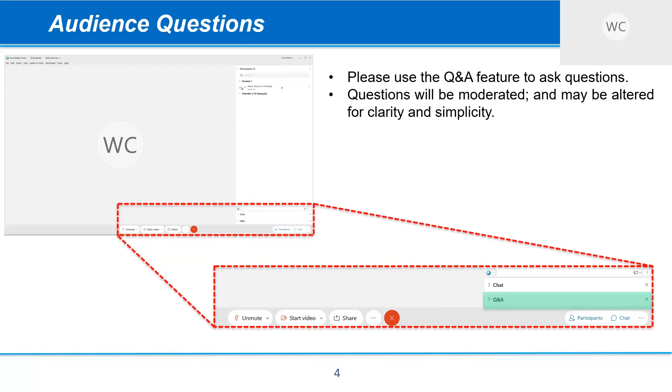So briefly, the Water Security Grand Challenge. The United States has historically benefited from access to low-cost water supplies, but challenges for freshwater supplies could threaten U.S. economic competitiveness and water security. The Water Security Grand Challenge is a White House-initiated, U.S. Department of Energy-led framework to advance technology and innovation to meet the global need for safe, secure, and affordable water.

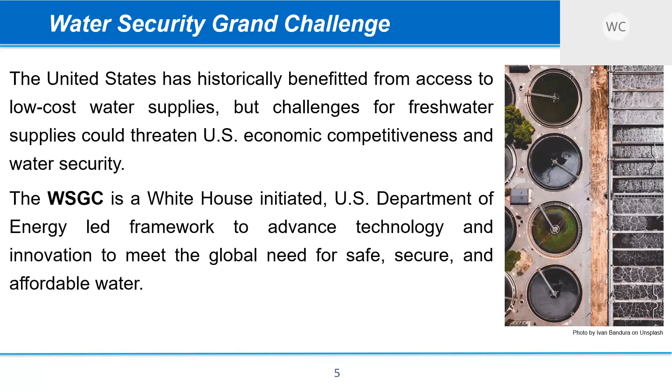Using a coordinated suite of prizes, competitions, early-stage research and development, and other programs, the Grand Challenge has set the following goals for the United States to reach by 2030: cost-competitive desalination technologies, transforming produced water from a waste to a resource, reducing water impacts at new and current thermoelectric power plants, doubling the resource recovery from municipal wastewater, which is what we'll be discussing today, and development of small modular energy water systems.

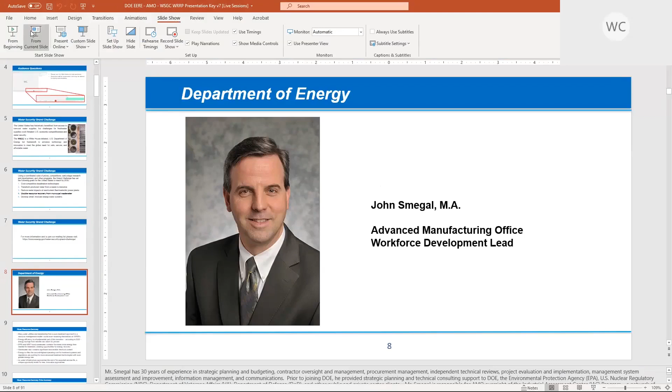Okay, just a second, I believe I have lost partial control from current slide. Apologies, I am having a little bit of technical difficulties. Oh, weird, apologies, just one second. My computer is not allowing me to pass keyboard control. William, if you can't give me control, I can just say advance if that works. Oh yes, that's actually a good solution. So I apologize. All right, that works for me, I don't mind.

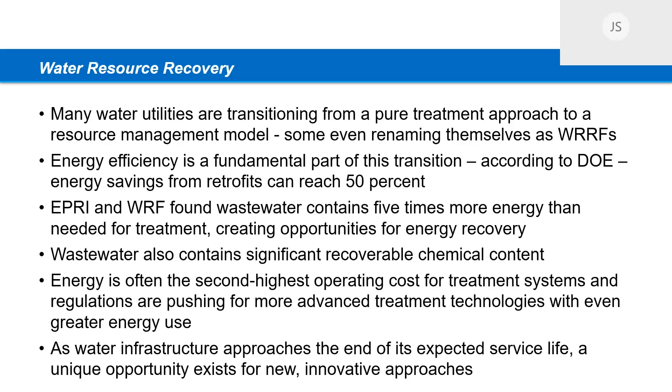The Water Resource Recovery Prize, as you all know, is 2 phases. We've just completed the first one, and that's why you're all here. The first phase is really a conceptual idea, a conceptual component, aimed at developing a library of solutions—10 winners that can potentially be leveraged or replicated in other settings. Phase 2, which is just getting underway here, is more of a demonstration of these technologies, providing a more enhanced menu of options aimed at reinforcing and capitalizing on previously discussed emerging trends within the industry.

The prize, as I said earlier, is looking at small and medium-sized facilities, and this competition has been unique in that it's beyond purely technology-based. Technology is the core of everything, but it's about expanding the technological feasibility outside the fence line of the facility itself. So we're talking about bringing in teams that represent all of the stakeholders, including downstream demanders. We're talking about utilities, agricultural interests, municipalities, engineering firms, universities. All of these were desired components of this phase 1 competition.

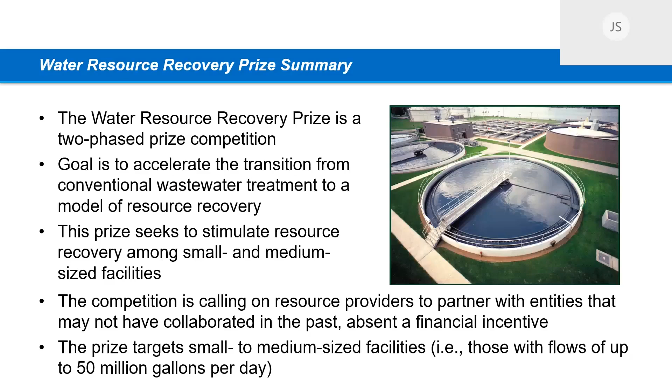All right, next slide. And this is my last slide. As you all know, we're right at that junction—we've gone through phase 1. COVID admittedly caused some delays in how we did this, but we're doing the best we can as far as that goes. So the timeline may be a little more delayed than what was originally envisioned, but right now, here we are in September, and we've passed that junction, and we're moving toward phase 2.

The phase 2 rules were released, I believe, on September 9th, and we're looking forward to a good process for the upcoming year.

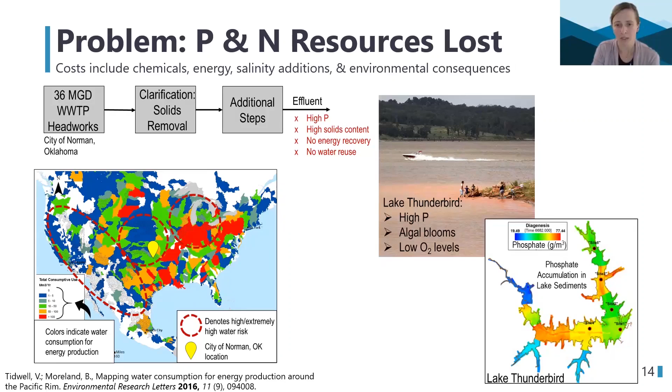So we're focused on the city of Norman in Oklahoma as our test case, and you can see in the slide I have a map here that shows water consumption across the U.S. for energy production, and also areas in the U.S. that have high water risk right now—and the city of Norman is in one of those areas.

So a little bit more about Norman. They are sort of an aging wastewater treatment plant that is looking to upgrade, and they're considered to be a medium-sized wastewater treatment facility in the central U.S., where there is a surplus of nutrients that would be good to recover, both phosphorus and nitrogen.

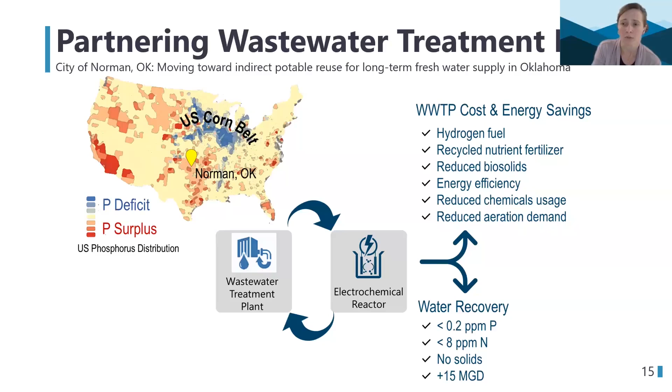And we see a lot of benefits for our potential technology, both in terms of water recovery and also in terms of cost and energy savings. I'll talk a little bit more about that in terms of the resources recovered.

Other significant benefits of our technology are that we also produce hydrogen, which can be recovered as a fuel during our electrochemical process. Because we use electrochemistry, we replace the need for chemical addition typically required for nutrient removal. So we're also reducing added salinity that's typically added to remove nitrogen and phosphorus in more traditional approaches, and we reduce overall chemical usage as a cost to the wastewater treatment plant.

And certainly another huge benefit is that we're going to be enabling a huge recovery in treated water for indirect potable reuse for the city of Norman as a new drinking water source.

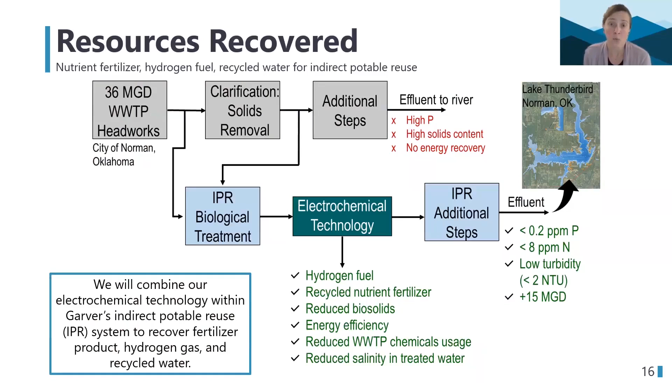So what we're looking to do is the electrochemical approach, which has the benefit of no additional salinity added, and we're recovering a fertilizer called struvite, which is magnesium ammonium phosphate, from our process.

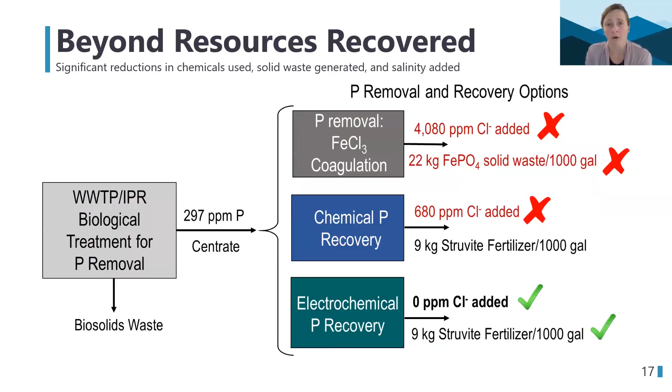My co-founder for Catalyze is Shelby Foster. She's the CEO and will be leading business development and the market business plan. We are partnering with Mike Watts and Sean Skouras from Garver, consulting engineers directly involved with the City of Norman and their indirect potable reuse project. We're also partnering with Chris Mattingly, Director of Utilities for the City of Norman, and we'll be working closely with all team members for phase 2.

And with that, a huge thank you for listening, and I look forward to any questions.

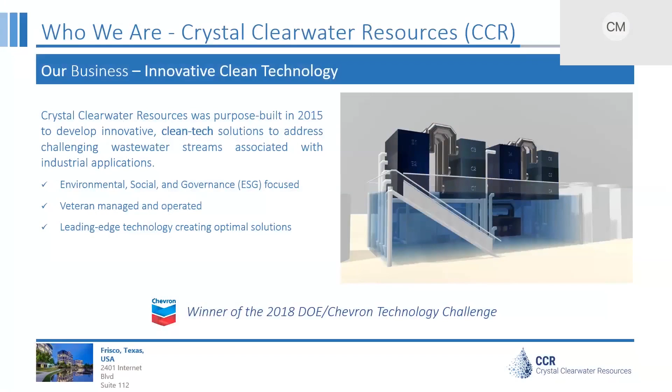We help companies fulfill the environmental aspect of their ESG standards by creating optimal solutions through leading-edge clean technology.

CCR's proposal is in partnership with Ramona Municipal Water District, Dudek, and Southern California Alliance of Publicly Owned Treatment Works, or SCAP. CCR proposes using our patented low-temperature distillation, or LTDis technology, to improve upon multiple aspects of the existing resource recovery process. Integrating our technology will increase the amount of recovered water available for reuse by nearly 100% and reduce the current disposal volumes by approximately 90%.

This reduction in disposal will eliminate an estimated 17,000 truck miles per year, significantly reducing the risks and environmental impact associated with the transportation of brine to the Point Loma ocean outfall.

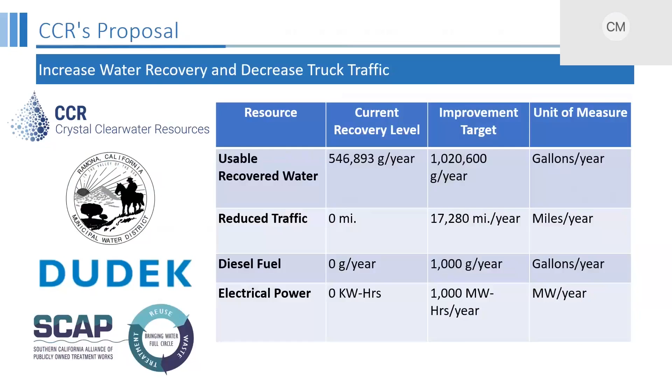The San Vicente Wastewater Treatment Plant currently utilizes reverse osmosis, or RO, as a component of their treatment process, which recovers approximately 550,000 gallons of reusable water per year. Integrating LTDis technology into the current treatment process will concentrate the existing RO waste stream, providing increased water recovery and decreased disposal volumes. This will result in lower disposal costs and lower greenhouse emissions from the disposal process.

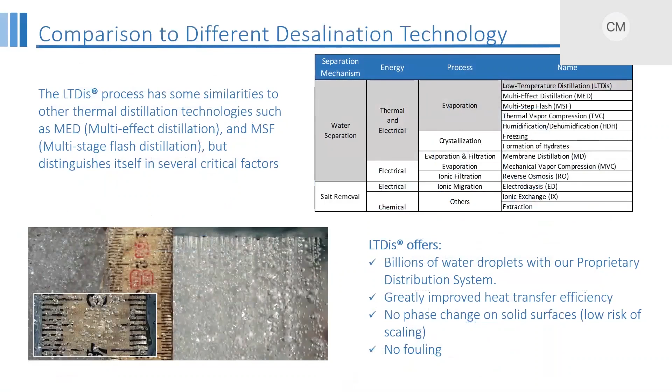Our proposal also requires a microturbine generator to drive the thermal process, which will provide all the required electricity for the LTDis plant. Excess electricity can be used to augment a portion of the electrical demand from the existing treatment process.

What differentiates the LTDis technology is that the phase change in the evaporation process occurs on billions of water droplets instead of tube bundles or membranes.

With no phase change on metal surfaces, this virtually eliminates scaling and fouling risk within the plant. Additionally, the droplets in the condensation process allow for a more efficient heat transfer. Our technology operates under vacuum and is tolerant to fluctuating wastewater streams of up to 300,000 parts per million, requires little to no pretreatment, and operates efficiently under both full and partial load conditions.

CCR's plants can utilize various heat sources ranging from conventional boiler systems to both low and high-grade waste heat to drive our thermal process.

LTDis is a step change technology from existing thermal distillation processes that promote seamless integration between other wastewater resource recovery facilities. Plant size can be scaled up or down to meet a facility's requirements. Our vertical design and lack of tube bundles allow for a significantly minimized footprint, making LTDis ideal for smaller applications where space is restricted. The standardized and modular design allows operators to be familiar with the systems across multiple facilities. Our technology augments an already robust system by allowing standardization in maintenance, personnel training, and plant equipment and supplies.

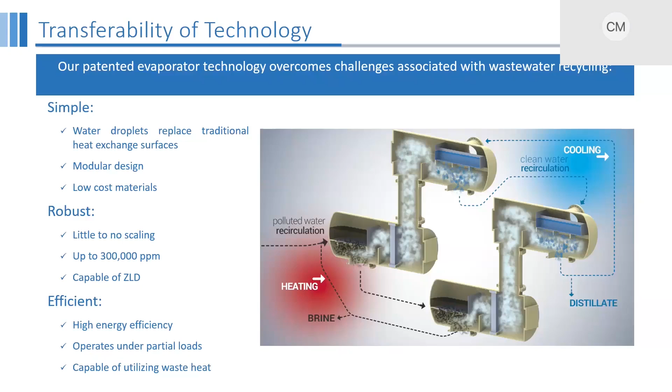While not economically viable at a location the size of the San Vicente facility, integrating our patented low temperature drying, or LT Dry, technology with our LTDis system, we can achieve zero liquid discharge, or ZLD. Combining these two technologies eliminates the need for brine disposal, resulting in a full separation of water and solids and potential recovery of other valuable minerals for reuse.

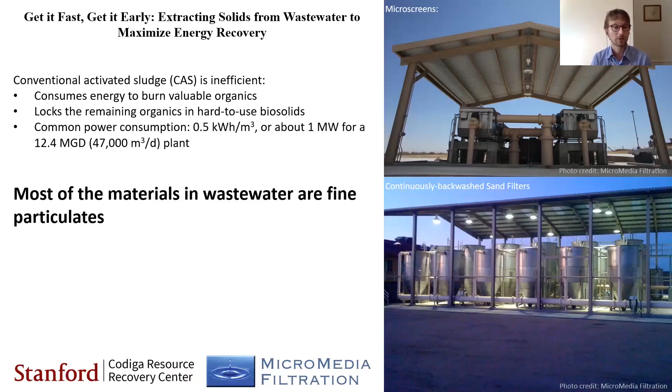Our approach that we're pioneering here is to really aggressively remove particulate matter from the wastewater upstream as soon as you can, essentially. Hence the name, get it fast, get it early. We're relying on two processes to do that. The first is this process you see on the left, called a microscreen. For wastewater professionals, that's a machine that looks very similar to a gravity belt thickener, but you use a screen that has a porosity.

In our case, the porosity can vary, but up to 300 microns is typical. The water filters through the belt, you intercept the solids, and they form a mat on the screen that promotes even greater filtration. You can extract the solids and dewater them, whereas the water flows on to the next process, which is a continuously backwashed upflow media filter. In this system, we have water flowing continuously up through a bed of sand, whereas the sand is constantly flowing down. This allows us to continuously clean the sand and achieve essentially optimal filtration constantly throughout the process.

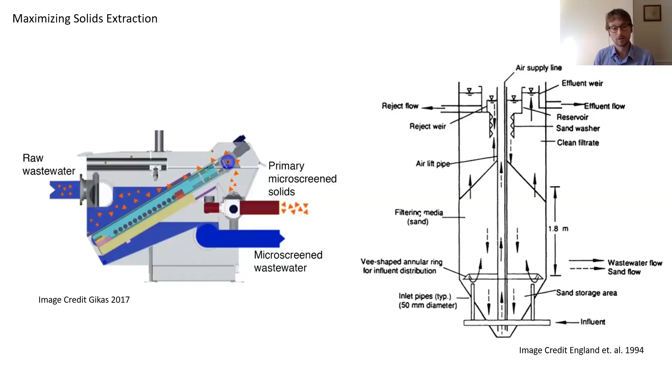These sand filters were previously certified in the New York City watershed as achieving equivalency to microfiltration. So you can achieve a very high degree of filtration upstream of your process, which makes everything else simpler and more energy efficient. To show the full process flow diagram of a typical treatment plant: you'd have your wastewater coming in with bar screens, grit removal, and then a primary clarifier, which achieves about 50% typical solids removal. So you're still sending a lot of solids into your biological treatment process that still need to be removed.

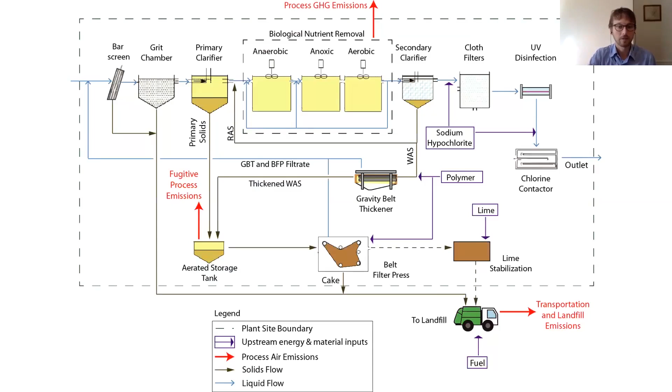By contrast, if you go to the next slide, the treatment process that we're proposing relies on a microscreen and then a primary filter, this advanced primary filter, to dramatically increase the amount of solids that are diverted and sent to solids handling. This is important because your solids have energy value and resource value, and your liquids, in general, the highest value is in the water.

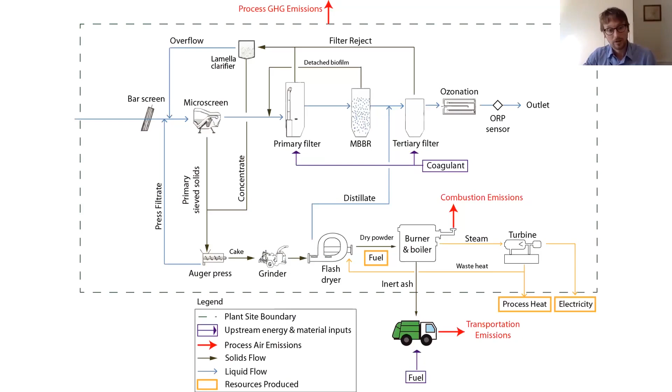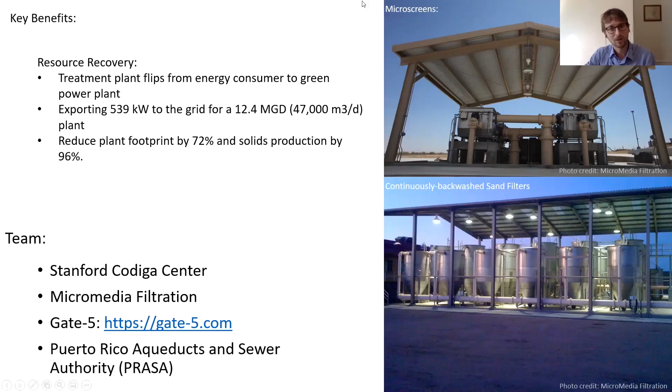Hi, thank you. So I'm the CEO of Impact Bioenergy, professional civil environmental engineer, certified for quality and organizational excellence, and we are also the owner, operator, and beneficial resource manager for distributed anaerobic digesters.

Let's advance to the next slide. Well, that's the cover the other way. So Impact Bioenergy has about 10 years of experience in applying traditional anaerobic digestion to small, distributed, in almost all cases modular and prefabricated digestion systems.

The focus has been on urban food waste, craft beverage manufacturing, food manufacturing, and now with this new project, with our phase one, we've pivoted back into the wastewater industry to merge our experience with other non-traditional feedstocks and look at co-digestion. So our skill set is to build modular, prefabricated, fast deployment digesters.

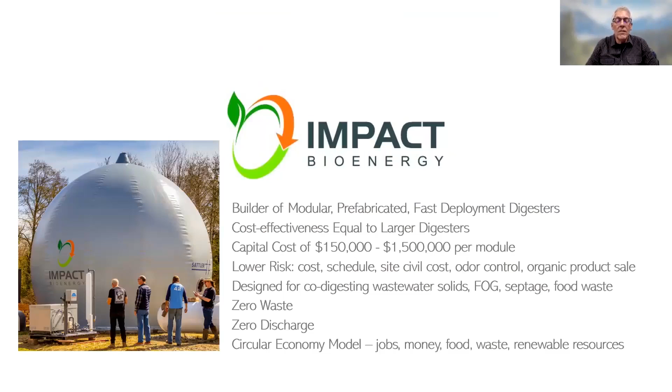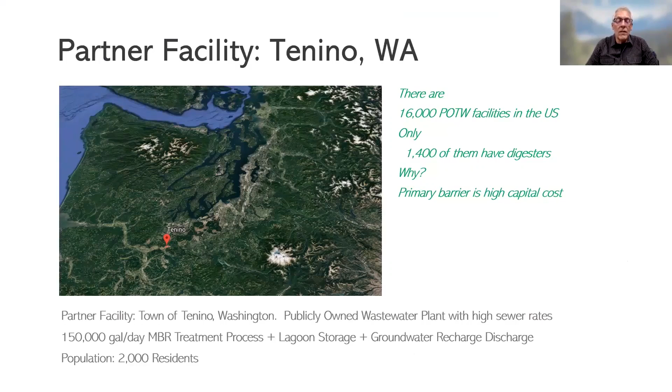Next slide, please. So the project that we advanced in phase one was called an Integrated Bioresource Recovery Project. And the objective is to prove cost effectiveness using a small to medium scale approach.

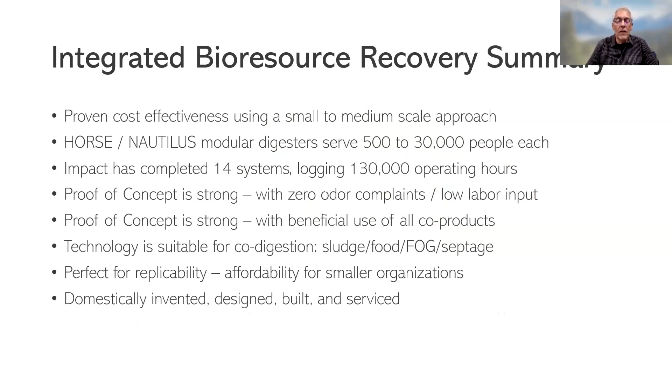Domestically, it's domestically invented, designed, built, and serviced. So this is a U.S. technology born in the Pacific Northwest, and we now have facilities across the country with the 14 systems already deployed. Next slide, please.

So we're actually partnering with the city and the county. It is a net energy producer, which is part of the backup. But the energy is only half the story. The organic outputs are the other half.

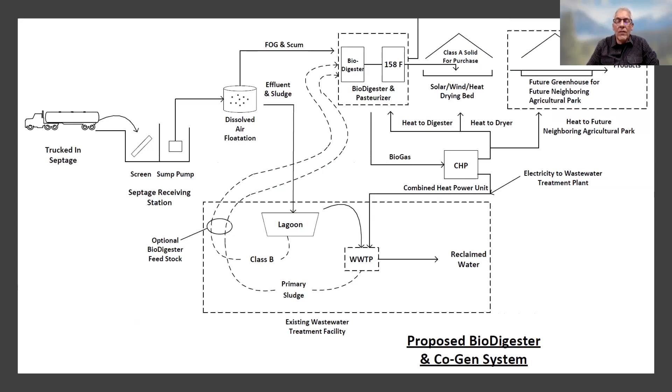Next slide, please. This is a graphic of how this works. And one of the reasons we can do this is we are eliminating a tremendous amount of diesel fuel and trucking and transportation. All of this is done, co-located at the wastewater plant. And it also supports some of these local businesses. There are a number of cases where food manufacturing or beverage manufacturing is causing problems for existing wastewater infrastructure, and we're directly addressing that. Next slide.

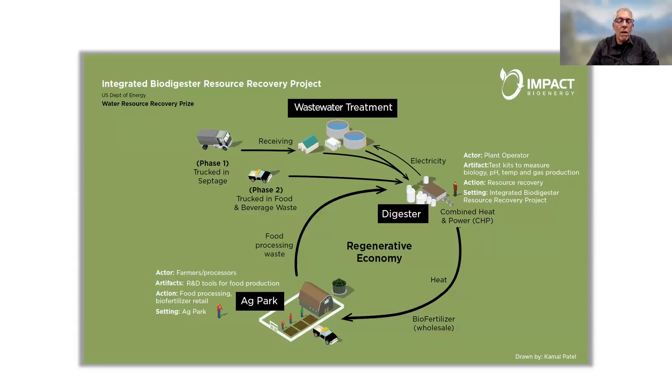And then the organic products go out as a liquid, and then we dehydrate them and make a blended fertilizer. And in many cases, we're being integrated with a farming system to actually take the organic outputs from the digester and go right into food production on site. So it's beneficial use of all the resources that come out of the digester, and it simultaneously improves air, water, soil, climate change, job market, that we can touch all of these simultaneously. Plus, the community becomes more resilient and independently sustainable.

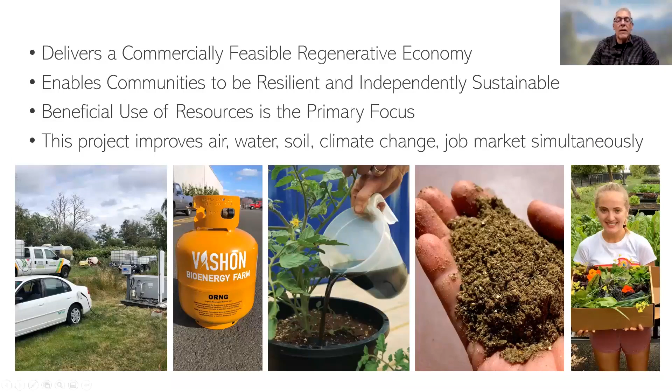Next slide, please. So, cost effectiveness. This is surprising, but we've been at this for 10 years trying to microscale digesters. It's a huge lift for us, but this does show that we compared our Nautilus, which is 1,500 wet tons a year, to the Hunts Point digester design report from 2010, and we are exactly the same capital cost per ton per year of input, which is how the metric we use.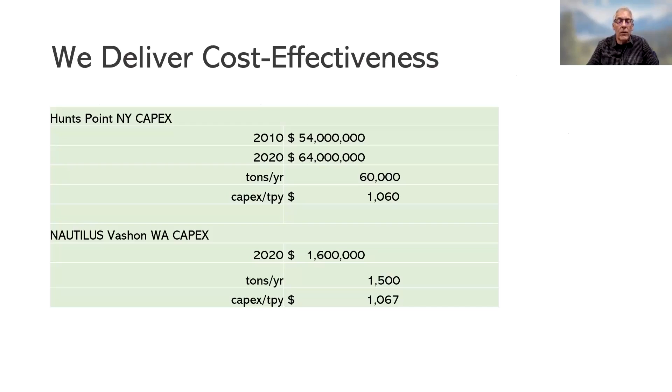So this can be, the economy of scale argument really does not hold water, so to speak, when we deploy these systems. We're equal to the larger systems in benefit cost ratio. Next slide, please.

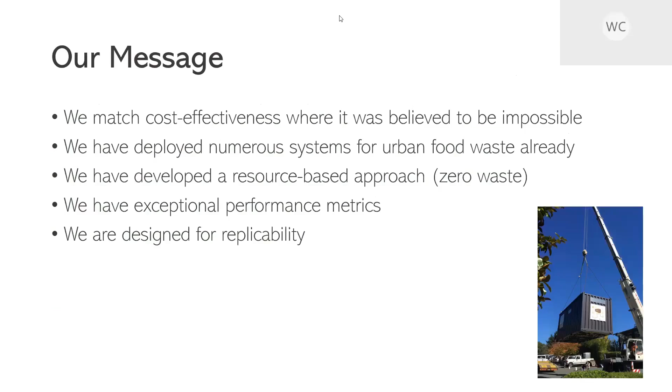So we're matching effective. Apologies to interrupt, Jan. Just due to timing, I have to cut you off. Okay, I apologize for that. But yeah, please have a second to take a look at this slide, and then I think this may be the last one. Yeah, that is. Thanks. And then thank you so much again for your talk, Jan.

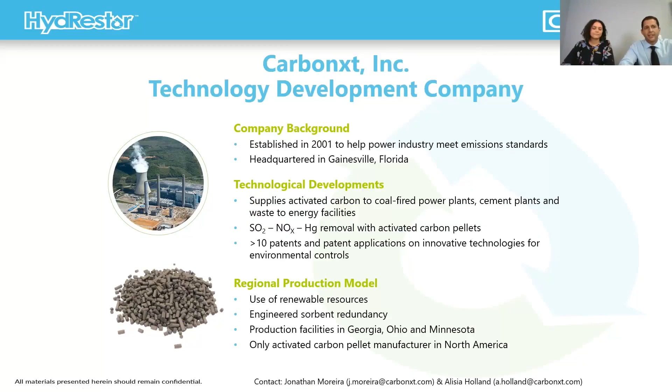With our headquarters in Florida, it's only natural that we take a keen interest in the ongoing water impairment catastrophe we've had here over the last few years with the blue-green algae blooms. The primary driver for this ecological disaster is the discharge of excess nutrients, both phosphorus and nitrogen, to our local waterways. The source of this discharge includes, but is not limited to, excess fertilizer, both from agricultural and residential sources, along with wastewater and stormwater runoff. The nutrient loading of a body of water is one of the factors we use to determine the health of the local ecosystem.

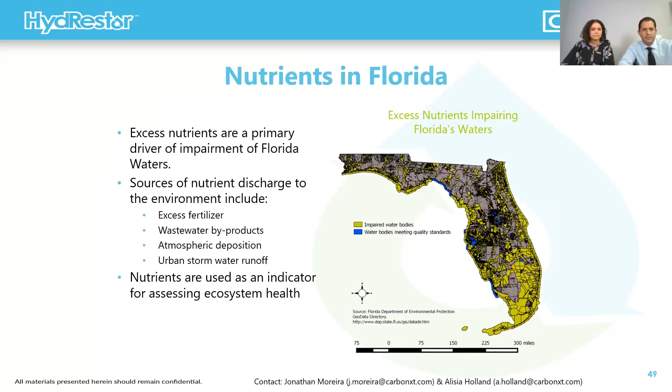So to attack impairment of our local waterways, Carbonxt has engineered a sorbent with enhanced phosphate sequestration capabilities. Its ability to both adsorb phosphate in application and subsequently be recovered and reused as a soil amendment makes this a doubly environmentally friendly solution.

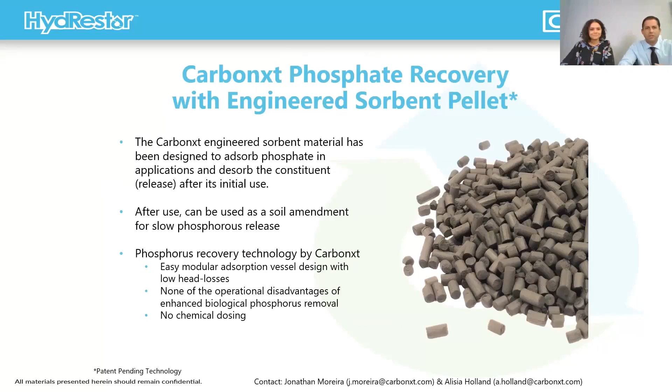The solution we're talking about is HydRestor. Additional advantages of our HydRestor technology versus traditional biological treatments include a much smaller footprint for our treatment vessels, an improved ability to handle fluctuations in influent nutrient concentration, as was asked earlier about seasonal fluctuations, and a reduction in system head loss. Couple these advantages with the copious other benefits throughout the media life cycle, and you have a bona fide solution to excess nutrients. Alisia will now delve into the pilot testing and results.

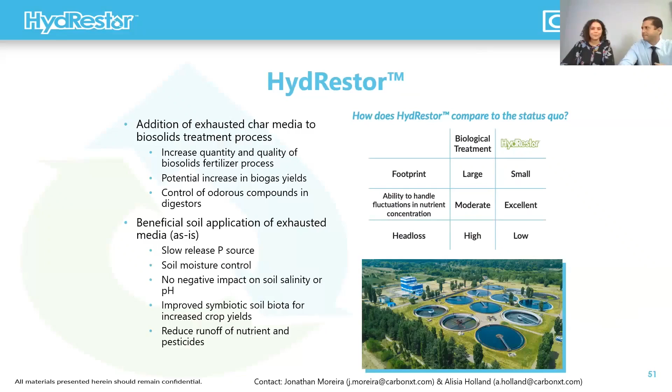William, can you please advance? Great, so again, my name is Alisia. I work in research and development at Carbonxt, and I'm excited to present some early results on our partnership using HydRestor with Braden River Utilities.

Braden River Utilities, or BRU, is a private utility that serves the Lakewood Ranch community in Southwest Florida, which straddles Sarasota and Manatee counties. They're contracted to receive up to 19 million gallons per day, or MGD, of reclaimed wastewater from the cities of Sarasota and Bradenton, as well as from Manatee County.

However, the water from Manatee County does not meet the Advanced Wastewater Treatment Standards, or AWT standards. So at scale, this project will process at least 1 MGD of non-AWT reclaimed water from Manatee County before storage and distribution, at a construction cost of about $1 million. This cost will be shared between BRU and the Southwest Florida Water Management District.

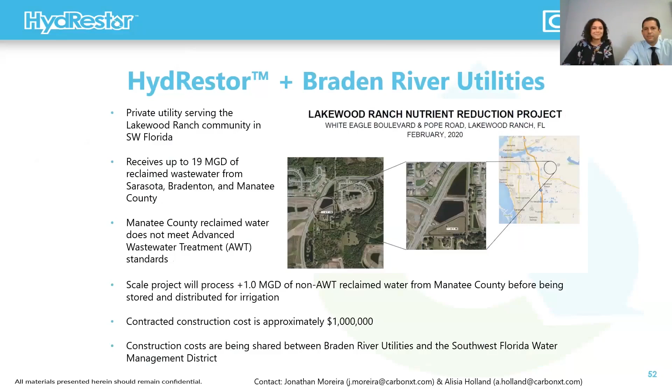So we tried this again at higher flow, and this is ongoing now in 2020. We had fluctuations between about 1 and 4 milligrams of phosphorus per liter in our influent, but our effluent was able to meet or exceed our treatment objective of 1 milligram per liter of phosphorus, even under high flow.

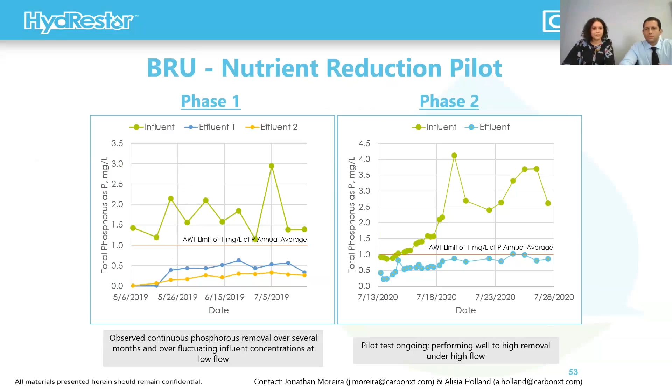You may be thinking, where can I fit this technology into my existing treatment plant? I think that's half the magic. Our media does very well in modular vessels as well as in cast-in-place structures, and it's designed to be placed downstream of secondary treatment and upstream of disinfection, but this is highly customizable to suit your needs.

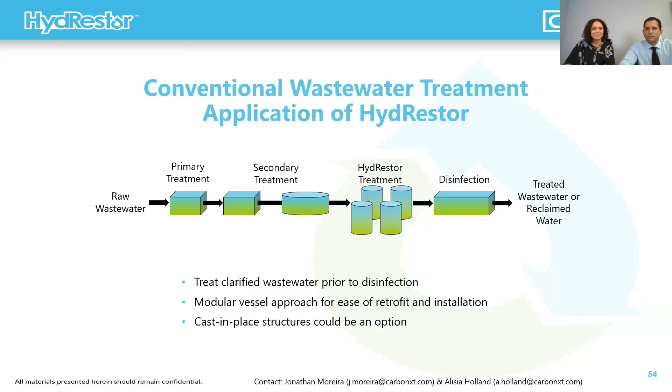So Carbonxt is currently pursuing pilots to gather additional performance data as well as to inform full-scale design, and our initial focus has been heavily trained on wastewater treatment plants. We've got 3 pilots identified: one, the BRU phase 2 is underway, and 2 are under construction. But we're looking to expand our outreach to other markets, including stormwater runoff, sugar farms, food and beverage, and other industries. And I would like to note that we are aggressively seeking partners on pilots, as well as for ongoing commercialization efforts.

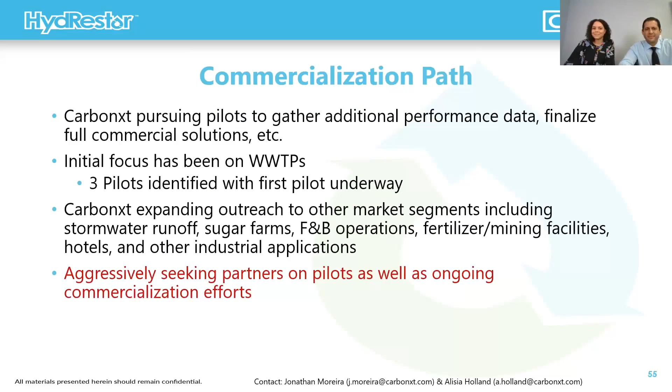So if you have a phosphorus problem, please take down our information, and we look forward to hearing from you. Thank you.

That's all from us, William. Thank you, Alisia. Thank you, Jonathan. I appreciate it. Thank you.

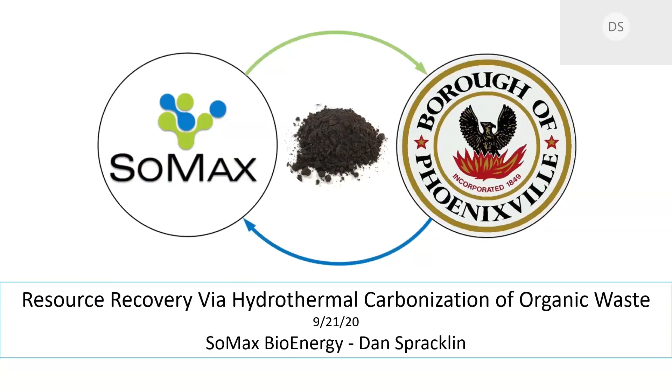At SoMax, we spent the last 8 years developing the HTC technology, and we've created partnerships not only with Villanova University School of Sustainable Engineering, but with the borough of Phoenixville as well. We brought together a team of industry and academia experts on biomass transformation and on wastewater treatment and resource recovery. Next slide, please.

So the problem that we're identifying is not only with wastewater treatment, but in organic waste in general. The hundreds of millions of tons of organic waste that we produce every year as a nation have really 3 solutions to them existing: first one is landfilling, second one is composting, and the third one is anaerobic digestion.

Now, the problems with these existing solutions are that they're not very efficient and they require lots of land to process the material. As you can see, composting and anaerobic digestion are only 10 and 50% carbon efficiency. They're basically only recovering up to half of the carbon that's in the feedstock, and they take weeks to months to process the material. Next slide, please.

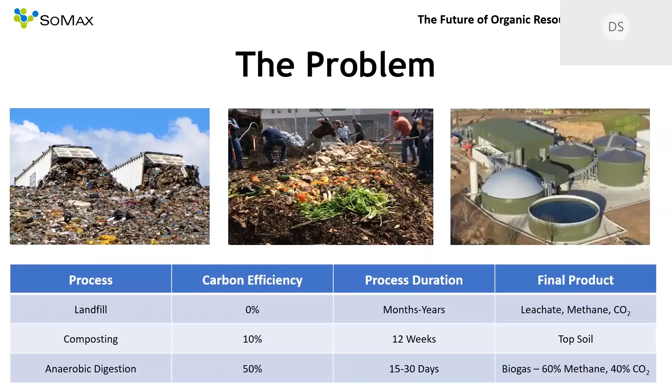So with hydrothermal carbonization, we solve these issues. HTC is a thermochemical process that mimics natural coal formation. But rather than hundreds of millions of years that Mother Nature takes, we accomplish this feat in as little as 30 minutes to 4 hours. We do this by applying mild heat, same temperature you would bake cookies at, 375 degrees Fahrenheit, and mild pressure. This keeps the wet material in a pressurized state that actually breaks molecular bonds of the waste material so that we can actually separate out and recover all the elemental components of that waste material, regardless of what it is.

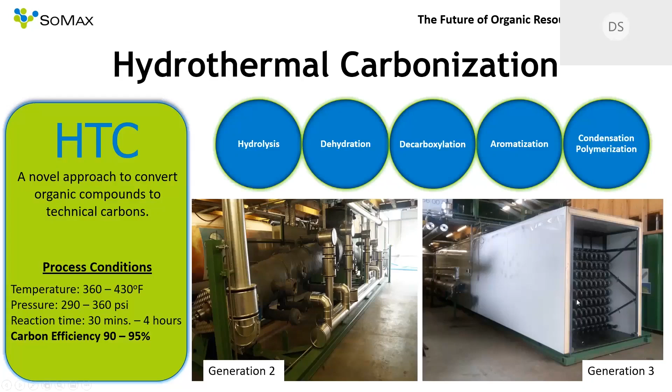Next slide, please. So our solution at Phoenixville actually involves sewage sludge, or biosolids, and food waste. The borough will actually bring in additional food waste to pair with their sludge, and will process 16,000 tons of material per year. Some of the highlights of this project is that we are generating 10 times more electrical energy than the wastewater treatment plant consumes.

We're creating 153% of the electrical demand of the wastewater treatment plant. That excess energy will be used within the borough to run borough facilities. It'll also run streetlights and stoplights. We'll get them to about 90% renewable energy and save them $1.8 million a year based on material that they were just throwing away. In addition to that, we have a carbon efficiency of 90%.

We also have the lowest greenhouse gas emissions of any biomass conversion process. We're able to increase their solids handling capacity by 10x without increasing the plant footprint at all. And we're able to dewater the hydrochar material over 50% without any polymers. In addition, we're creating pathogen-free sanitary products that eliminate or destroy pharmaceuticals, antibiotics, and PFOAs, or forever chemicals.

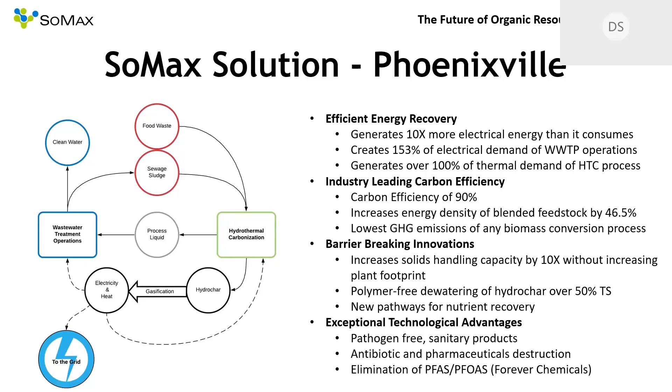Next slide, please. So our baseline solution of products out of HTC are a hydrochar, which is a coal-like substance. It can be used directly as a soil amendment, and a liquid product that's a nutrient-rich process oil that can be used as a fertilizer. Various post-treatments, both on the solid and the liquid side, allow us to extract additional nutrients in the form of ammonium sulfate, nutrient concentrate, and then provide distilled water.

On the solid side, we can activate that hydrochar to become activated carbon. We can gasify it for renewable energy and ash, and then we can recover phosphorus from the solid component. Next slide, please.

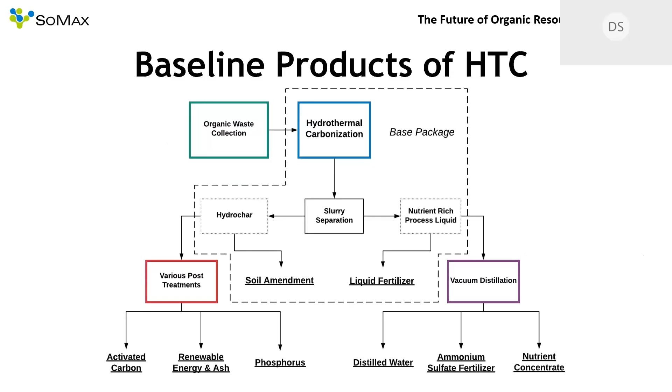So beyond just power generation, what we're doing at Phoenixville, we have a variety of products that we can create from the solid side that act as a carbon sink. Everything from batteries and supercapacitors to activated carbons, graphenes, carbon nanotubes, in addition to sustainable building materials. Anything that's not used as energy acts as a carbon sink, allowing us to pull down carbon emissions from the atmosphere, or keep them out of the atmosphere, and sequester them for a long period of time. Doing this at scale has the ability to sequester gigatons of carbon every year.

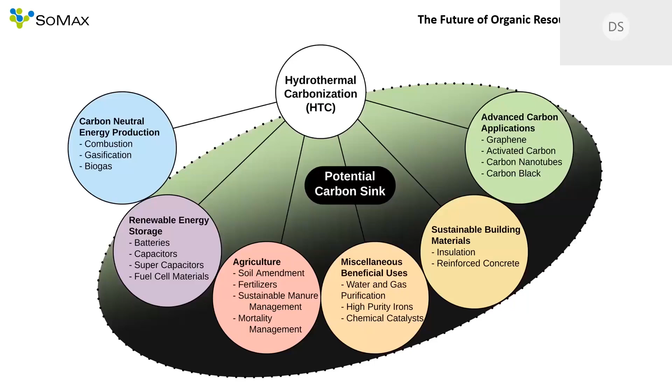Next slide, please. So the HTC process is really a bolt-on process at any wastewater treatment plant. We intersect directly at the biosolids or the solid separation, so we don't interrupt the treatment plant process at all. We're not acting to go in front of any component, we're at the back end of the treatment plant.

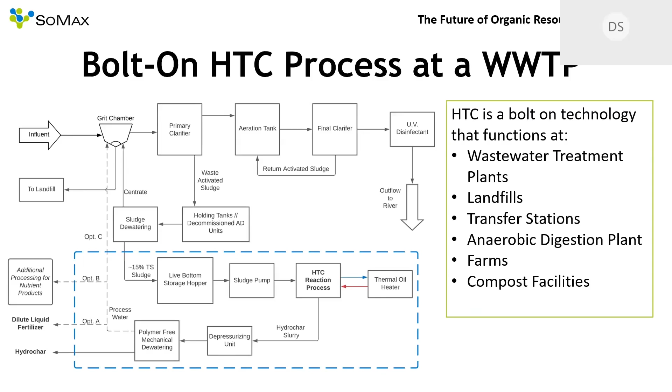We put in our system to bolt on, and this not only functions at wastewater treatment plants, it can be installed at landfills, transfer stations, anaerobic digestion plants, farms, or compost facilities. So this would apply across the country at any wastewater treatment plant. We intersect at the point where you dewater your biosolids. Next slide please, and with that, here's contact information. Thank you very much for your time.

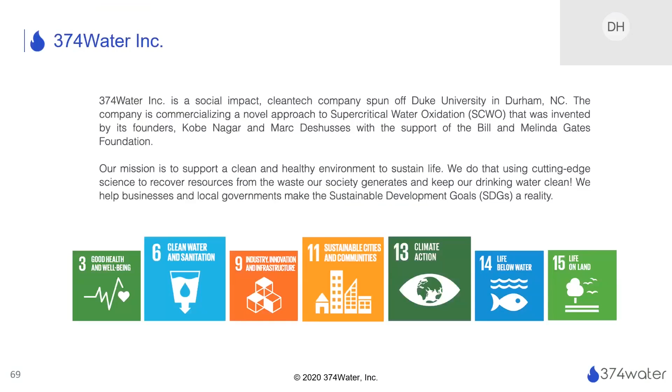Next slide. What we're trying to do with the supercritical water oxidative technology and with 374 Water is to really shift the paradigm from waste treatment to resource recovery. As mentioned earlier, we're looking at recovering resources, but more importantly, we're also looking at decentralized modular waste treatment. We're finding, and I think we as a society are finding, that large centralized waste and wastewater treatment facilities may not be the most affordable and most effective way to handle our wastes.

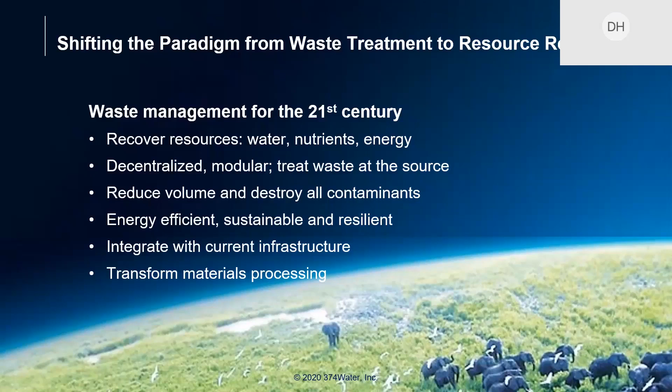Next slide, please. So, as mentioned, a barrel of fecal waste contains about 87 kilowatt-hours of energy, which is enough to power a Tesla S P90. As you see here, this is a picture of a developing country, and they're basically pouring all that energy off into the river, which leads to environmental contamination, poor living conditions and health standards, but also we lose the opportunity to reuse that pent-up energy.

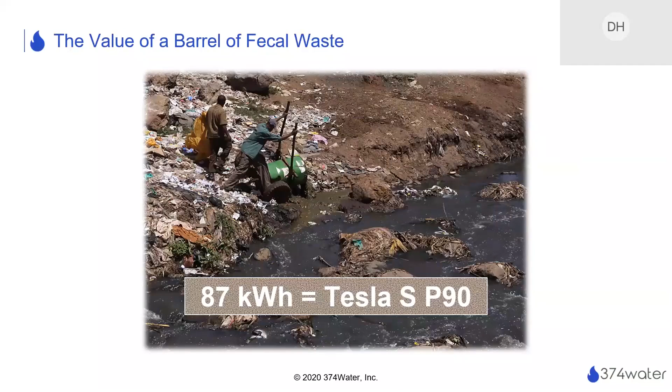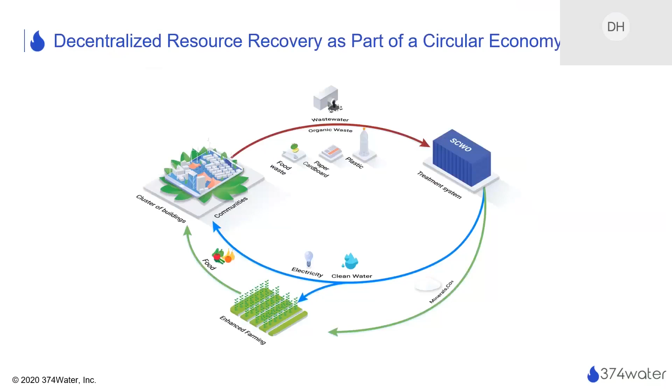Next slide. What we're looking at with the supercritical water oxidation is contributing to a circular economy where we can take wastewater and organic waste, put it through the system, generate clean water and electricity, minerals that can be reused, which can then be put back into the cycle for enhanced farming and food, as well as providing electricity back into our communities. Next slide.

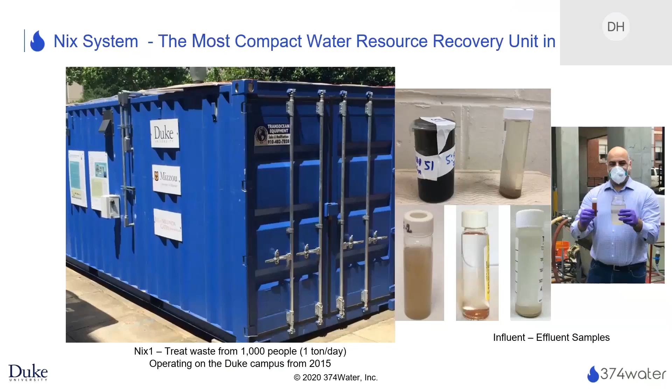Supercritical water oxidation is taking advantage of the unique properties of water when it's raised past its supercritical point, which is above 374 degrees C, about 705 degrees Fahrenheit, and above 221 bar, roughly 3,200 psi. When you have organic waste with air as an oxygen source at that temperature in a reactor, the organics are fully soluble and miscible in the solution, and the oxygen is then able to essentially mineralize the organic materials and bring it down to just clean water and CO2.

It's an exothermic reaction, so there is electricity that can be generated. That electricity is used to reheat the influent stream in the process, and in larger units can be used to actually push electricity out to the site for reuse somewhere else on the location. We also can create heat, which can be recycled and reused for heat as well. And then we have minerals, which can be used for fertilizers and other things. The interesting thing is this all occurs in seconds within a reactor. We're finding that this is also very useful in destroying microplastics and contaminants such as PFAS. Next slide.

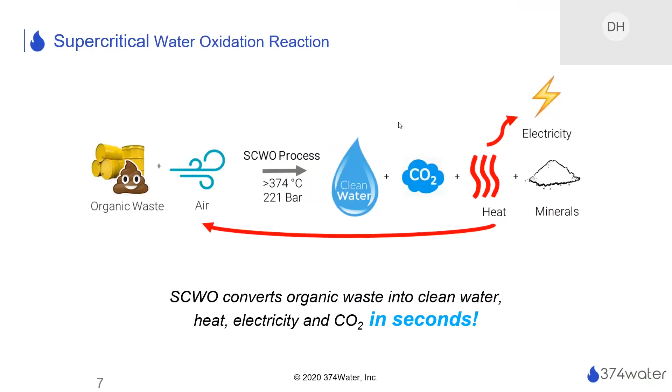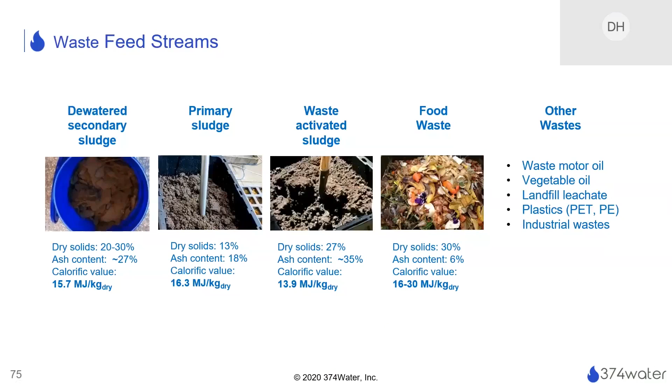Next slide. Right now, commercially, we're looking at creating 3 commercial units: the Nix 6, which would be 6 tons nominal per day, the Nix 30 at 30 tons per day, and the Nix 200 at 200 tons per day. We are currently operating, or Duke has, a pilot unit, a Nix 1, operating at Durham, which we use for treatability demonstrations right now. For the Nix 30 and the Nix 200, we actually have the generation of electricity, which comes out of the reactors and can be reused elsewhere.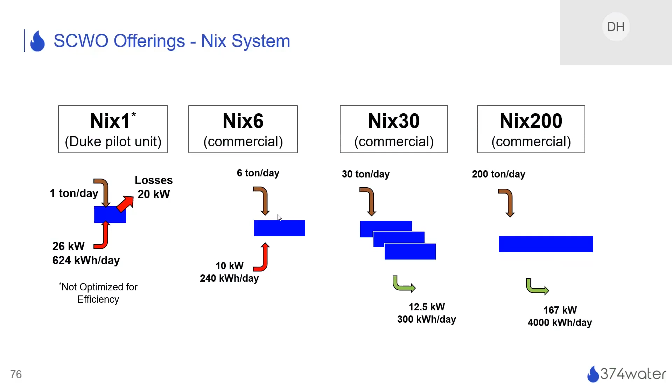Next slide. The implementation of the SCWO unit is very simple. It takes up very little space and can be put into an existing wastewater treatment plant process train. If it's going to be treating the biosolids and sludges, it can replace active aerobic digestion, and it can even replace and is looking to be more promising than thermal hydrolysis. It takes up a very small footprint and can be placed anywhere on a waste source site.

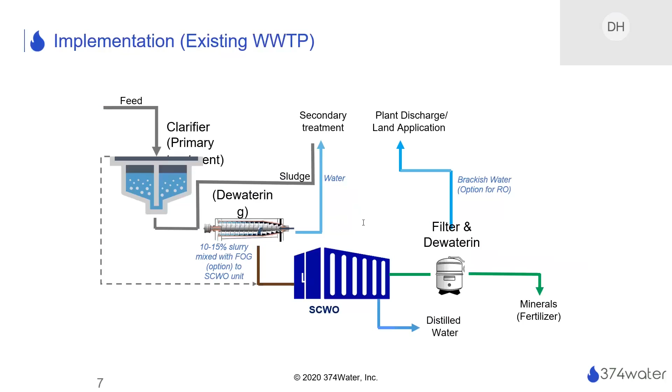Next slide. There'll be a picture that shows the comparison - if you look, you'll see in the blue circle, these would be 3 SCWO units, 3 Nix 30 units, which would replace all the items X'd out here for being able to handle the biosolids. So you would save electricity from those units, reduce carbon dioxide generation from the electricity consumed in the operation of those units, and you'd see significantly less footprint, plus you'd be creating electricity as well. Next slide.

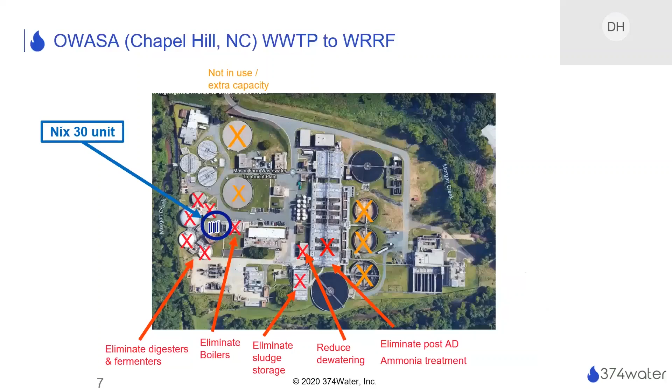That is 374 Water. Thank you.

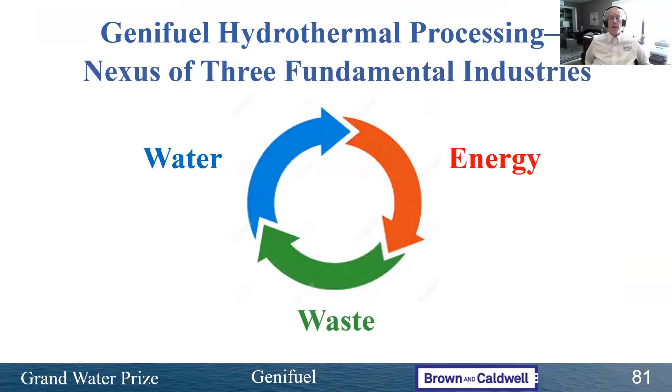The process is very similar to the way fossil fuels were formed, where you have wet organic matter, and over millions of years with temperature and pressure, you form liquid and gas hydrocarbons. We do the same thing exactly, but we do it in about 1 hour. It's a hydrothermal process, wet and hot, 350 degrees C and 21 megapascals or 200 bar. The conversion is complete as I described. Next slide.

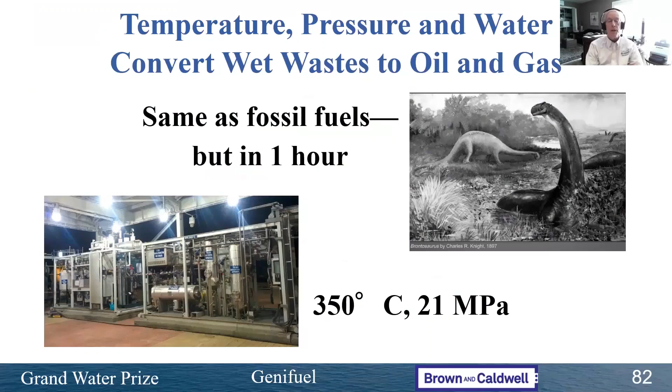This technology was developed by the U.S. Department of Energy at the Pacific Northwest National Laboratory, and we've been partnering with them for more than 10 years to bring this to market. Next slide.

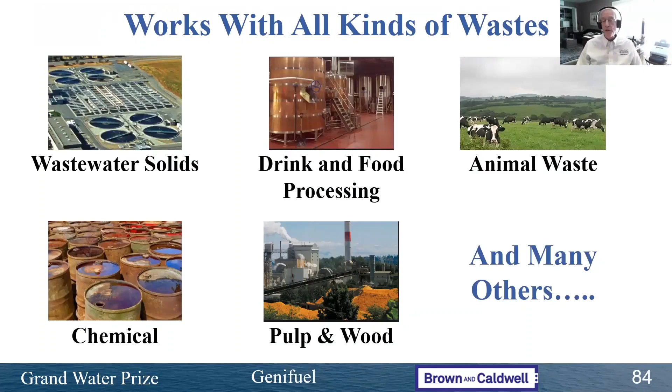The outputs of this are a biocrude oil, which looks just like petroleum crude, and a renewable natural gas, which is methane. The biocrude is refined at a refinery, a conventional facility, into diesel, gasoline, and jet fuel, or any other product that a traditional refinery outputs. It works the same way. And the renewable natural gas can be put into a pipeline. Next slide.

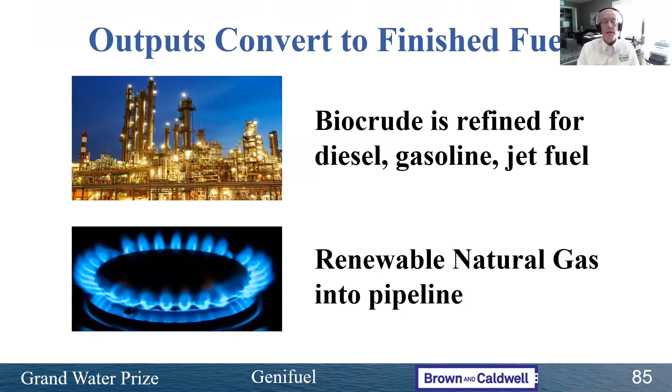The particular project we're working on for this prize is the city of Anacortes, Washington, which is up in the northwest corner of Washington State. It's a utility serving about 17,000 people. Currently, Anacortes is using an incinerator, a fluidized bed incinerator, to dispose of their wastewater solids, and the city wants and needs to replace this with a hydrothermal processing system. Our refining partner, since the biocrude oil is refined, is Kern Oil and Refining in Bakersfield, California.

One of the benefits of this refining step is that by producing renewable transportation fuels, these outputs are eligible for both federal and state programs which provide tradable credits, sometimes equaling more than the original cost of the fuel at the federal and state level. So those are all available with the fuels produced by our process. Next slide.

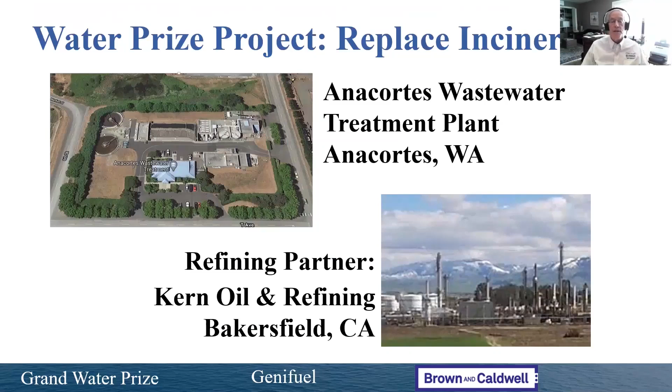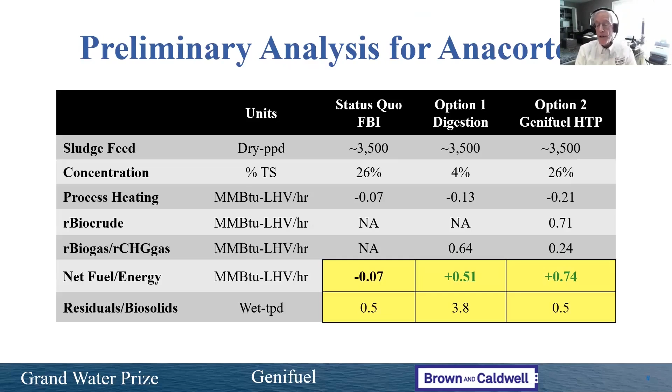Thank you, James. Oh, wow, I didn't realize we were already at the end of our second panel. So we're now up for another audience Q&A. At this time, Catherine, I can't tell if there are any additional questions. I don't see any. Presenters, you did a great job. Yes. Oh, I think I just saw one pop up.

So there's a question for Genifuel. What is the scale of the systems your process functions at?

Yes, so it's highly scalable. We have built systems all the way from bench scale up to current systems being designed and constructed now, which are processing about 10 wet tons per day, and they can be scaled up further from that. It's highly scalable, and at this point we don't know the upper end. We project somewhere between 50 and 100 wet tons per day per system, with modules to go beyond that.